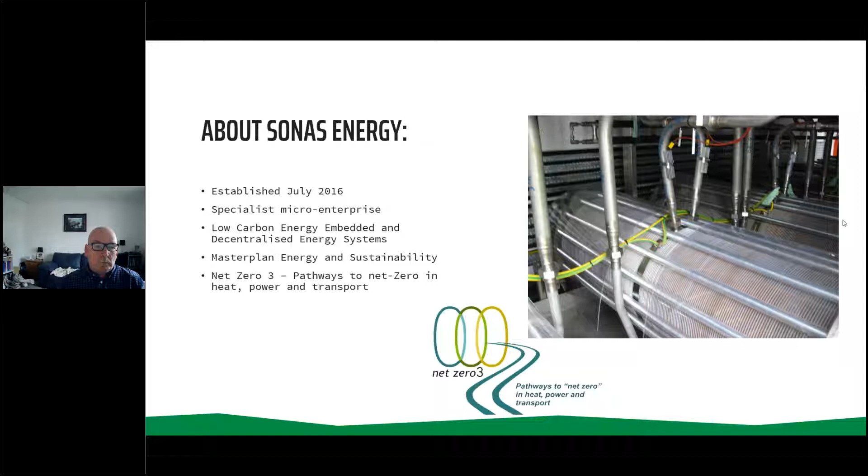Well, I started work as a physicist in the nuclear industry, working at Dounreay on the fast breeder reactor, but I'm now an energy and sustainability specialist. In the late 80s, I started a specialist sustainability consultancy called Factor 10. Sustainability at that time was a niche market and we called it industrial environmental management. I then took Factor 10 into the multidiscipline consultancy Hurley Palmer Flatt to become their energy and sustainability division based in Scotland. And I worked with Henry Boot Developments through the initial concept stages for TECA and were then novated to Robertson's to design and build the energy centre, 5 years from initial concept to commissioning. Recent roles are a smart microgrid with net zero trajectory for Westlakes Science Park near Whitehaven and work on hydrogen biofuel supply systems for decarbonising HGVs. And I'm currently working with SEC with Suzanne on the net zero trajectory for the Scottish Event Campus.

Okay, Suzanne. Okay, thanks David. So the agenda, a rough format for our presentation today. It's obviously quite difficult to condense 5 years project experience into 1 hour or 45 minutes, but we'll try and keep it concise and cover the following items. So I'm sure some of you on the call will be familiar with the project. However, I'll begin with a quick project overview covering the main features of the venue before David takes you through the energy strategy, the good stuff, in a bit more detail.

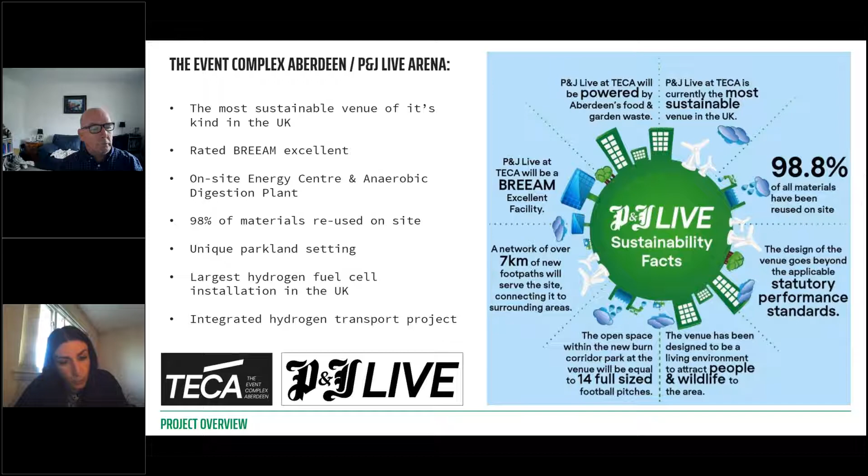So 98% of all materials have been reused on site, and the creation of a very unique parkland setting for the venue has resulted in an enhanced living environment, which is designed to attract both people and wildlife to the area. We have the largest hydrogen fuel cell installation in the UK, and also TECA is part of an ambitious hydrogen transport project that will fuel public transport buses to and from the venue.

So a bit of background on Aberdeen's vision for the facility. TECA is truly a transformational development for the city of Aberdeen. This unique facility provides highly flexible state-of-the-art accommodation, creating a contemporary world-class facility that will attract major national and international artists and events to Aberdeen.

And at the old AACC venue, a sea of temporary structures and tents had to be erected to facilitate the exhibition. So a new, larger venue was required to ensure that Aberdeen not only retained the Offshore Europe exhibition, but also maintained its status as the energy capital of Europe.

This also gave Aberdeen an opportunity to showcase renewable technologies and reflect that ambition to create the most sustainable venue of its type in the UK. So over the next 10 years, it's estimated that an additional 4.5 million visitors, 113 million visitor spend and 63 million net GVA to the Scottish economy as a result of this new facility.

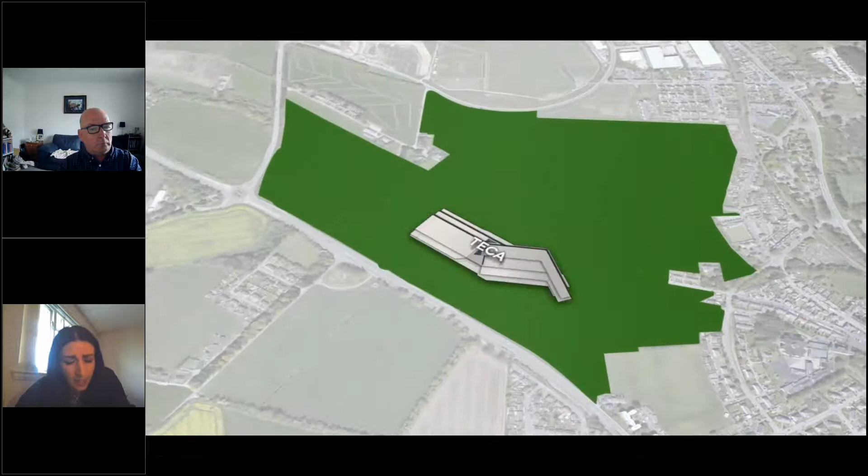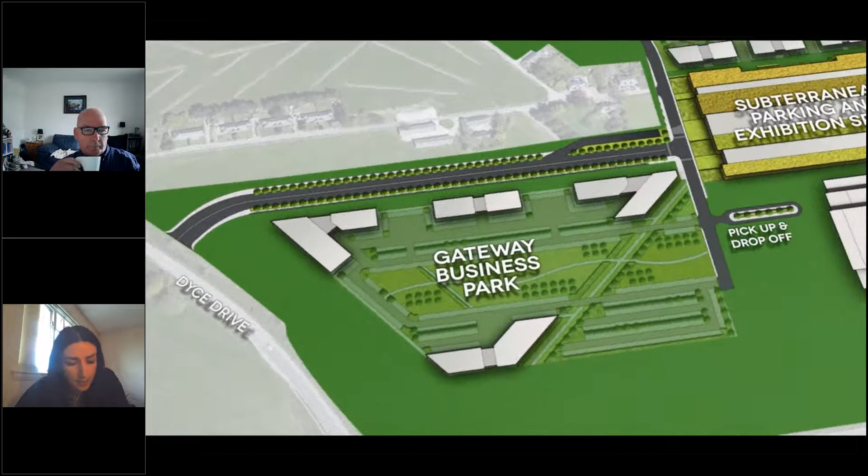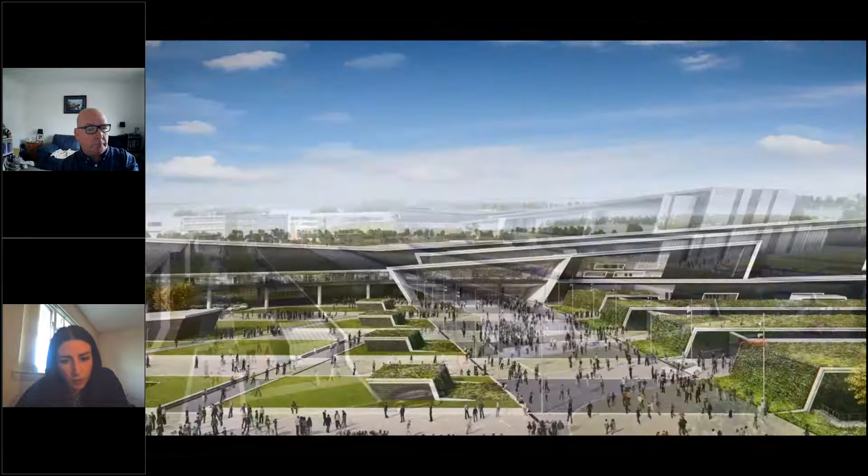So the location of the site is situated just south of Aberdeen International Airport. The Masterplan context with the TECA venue sitting within a parkland setting as part of a mixed-use wider Masterplan development. Central to this is the creation of a green-roofed subterranean car park, which doubles up as additional exhibition space, and a central landscaped plaza, which the main entrance of the building faces onto.

So if we go inside the building, on ground floor, we have a central concourse which ties together the three main exhibition halls and the adjoining 4-star Hilton Hotel.

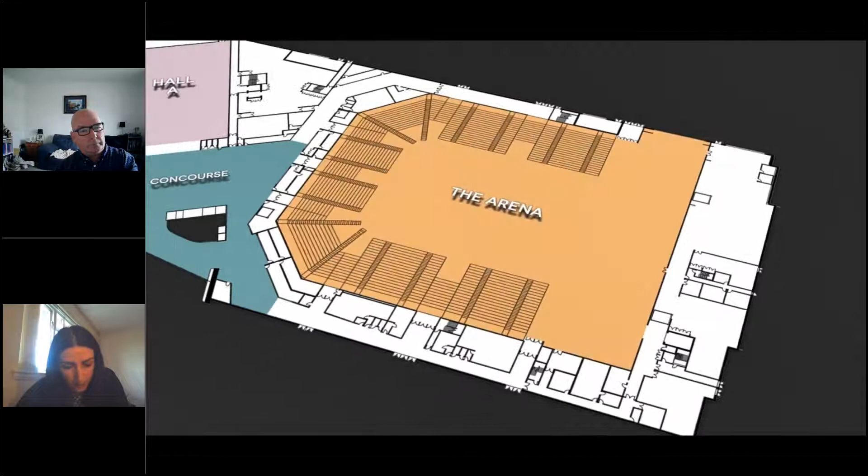At the other side of the building, we have the P&J Live Arena with VIP boxes wrapping around at first floor level, a central restaurant along with various conference suites and meeting facilities which also tie into the 200-bed Hilton Hotel at the end there.

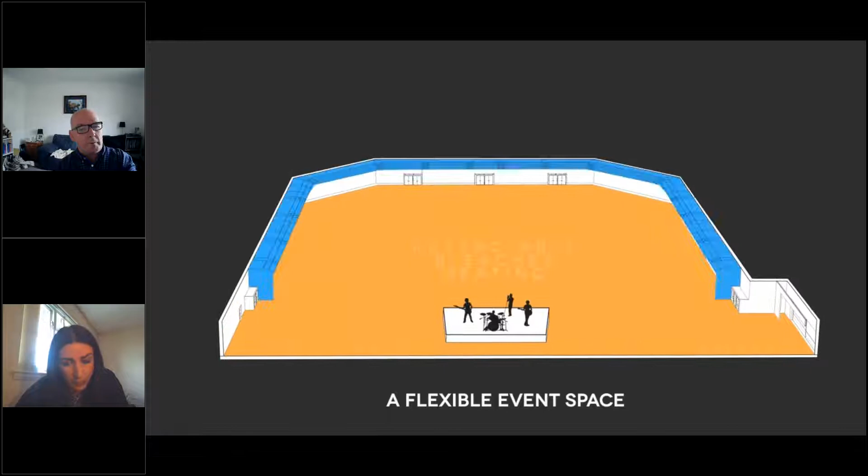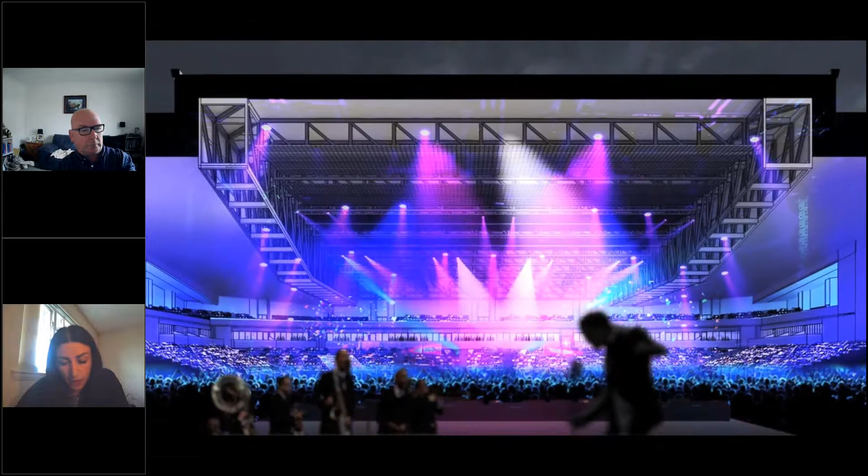Above the arena, we have an additional level of fixed seating at the second floor, and then the arena itself has retractable seating at ground floor, offering a flexible event space that holds up to 15,000 people for a live event. And this makes it the largest indoor arena in Scotland, just pipping the SSE Hydro in Glasgow to the post there.

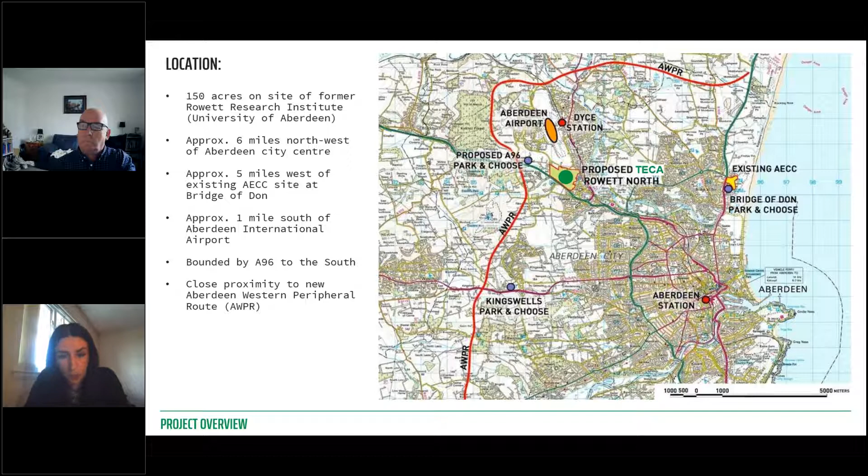In terms of site location, the site is approximately 150 acres. It was home to the former Rowett Research Institute at University of Aberdeen, and under contract to the developer Henry Boot Developments. The Rowett were relocating to a brand new campus, thus creating an opportunity for significant redevelopment and regeneration of the Masterplan area. It's approximately 6 miles northwest of Aberdeen city centre, just south of the airport, bounded by the A96 to the south and in close proximity to the new AWPR route.

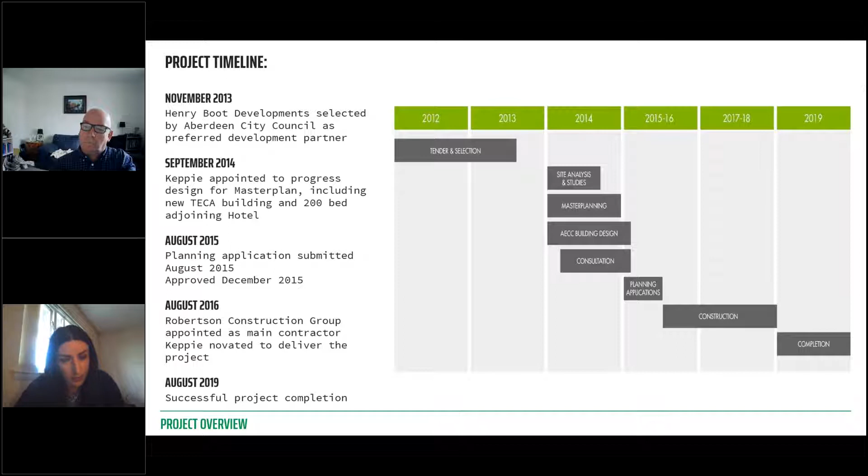Project timeline: in November 2013, Henry Boot Developments were selected by Aberdeen City Council as their preferred development partner. I came on board when KEPPIE were appointed around September 2014 to progress a PPIP master plan, as well as a detailed application for the new TECA building and the adjoining 200-bed hotel. We submitted the planning application in August 2015, and it was approved in December of the same year - a really smooth process. Just a year later, Robertson Construction Group were appointed as main contractor to deliver the project, and after a 3-year construction period, the project was successfully completed in August 2019.

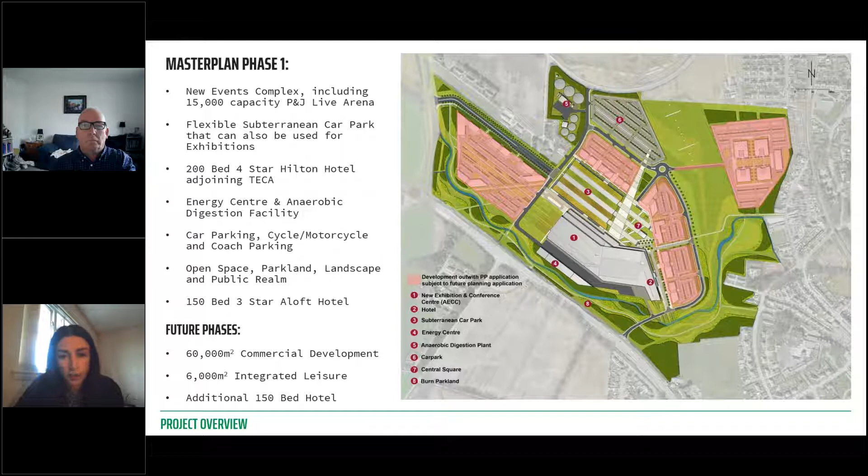The new facility represents phase 1 of the wider TECA master plan, acting as a catalyst for the regeneration of the Rowett site and surrounding areas. Phase 1 includes the TECA building itself, a flexible subterranean car park that can also be used for exhibitions, a 200-bed 4-star Hilton hotel physically joined to TECA, an energy centre and anaerobic digestion facility, car parking, open space, parkland, landscape and public realm areas, as well as an additional 150-bed 3-star hotel. Future phases as part of the PPIP include potential for around 60,000 square metres of additional commercial development with integrated leisure use, and hopefully another 150-bed hotel in the pipeline too.

In terms of the interior of the TECA building, there's a variety of highly flexible state-of-the-art accommodation offered, the main space being that arena - a 9,000 square metre arena providing 15,000 maximum capacity for live events. We've also got a variety of exhibition halls, 6,000 square metres of main halls subdivisible into 3, and this mammoth subterranean space, which provides an additional 33,500 square metres of exhibition space and can be used for large events such as Offshore Europe.

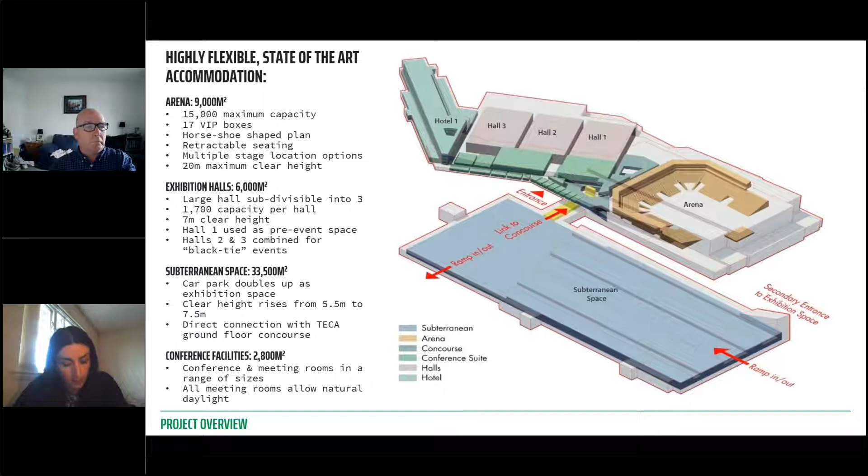The subterranean space has a green roof and living walls, which tie it nicely into the landscape design and into that public plaza in front of the main entrance. On the upper levels, we have a variety of conference facilities, all offering state-of-the-art AV conference technology.

The project was delivered using BIM 3D modelling. BIM stands for Building Information Modelling, and it's essentially a method of coordinating project information using a common data environment - bringing together all information from different project disciplines into one single point of reference, with models from different disciplines that we then collate and collaborate together.

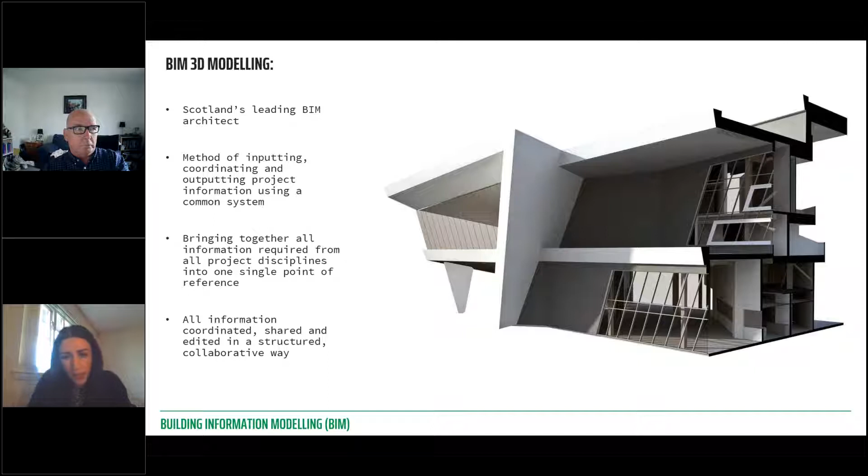For example, we've got the structural engineers' model, which has all the different steel and concrete elements modelled. Layer on top of that, the mechanical engineers' components, so the building services model. And then on top of that, we layer on the building envelope. This results in a fully coordinated architectural 3D model.

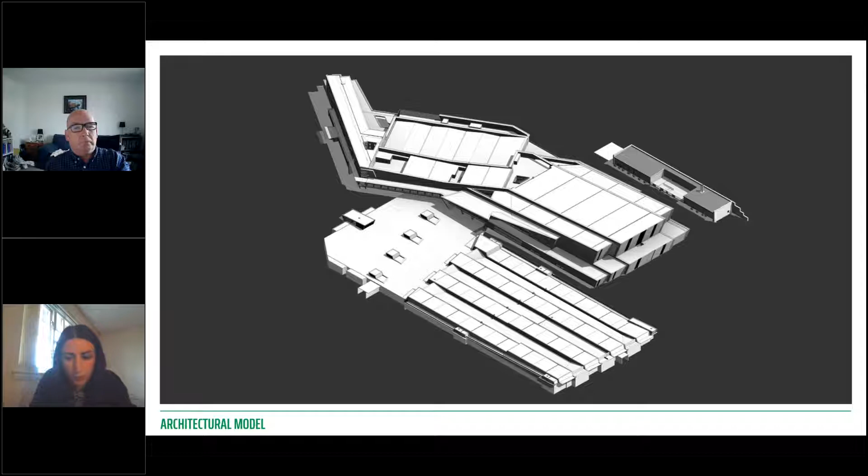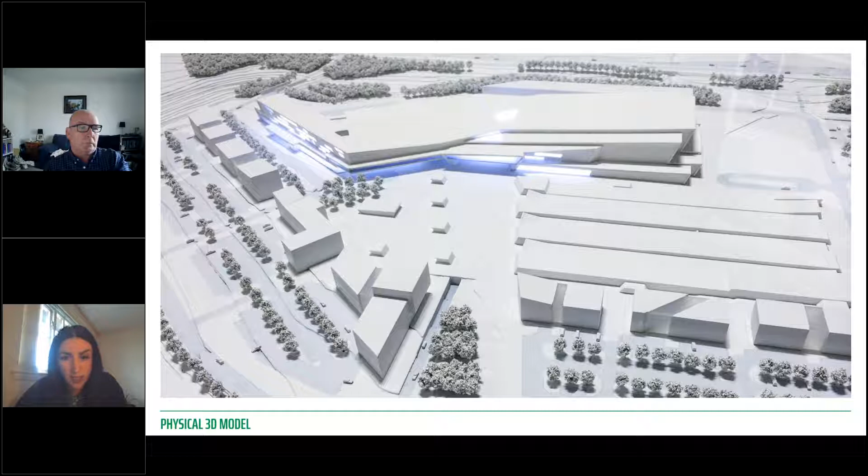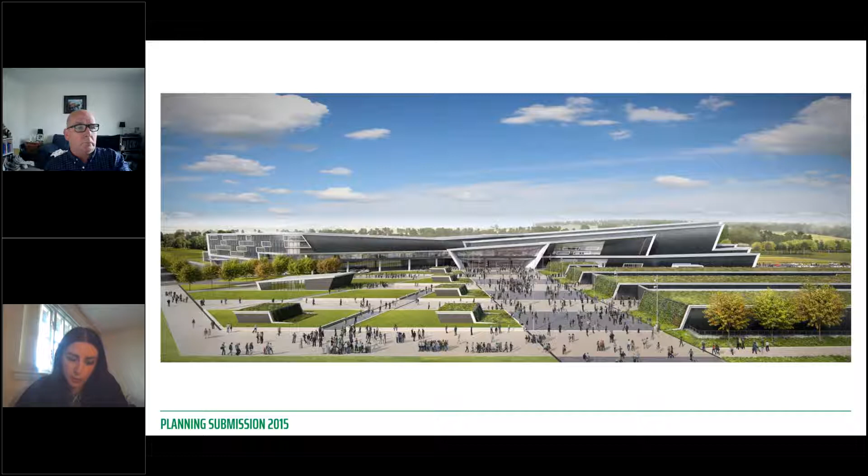The 3D model information also allowed us to develop a series of key views as agreed with Aberdeen City Council Planning Department as part of the planning submission. The images produced for planning were also used for marketing purposes and featured quite heavily in the local press.

From an architectural point of view, this was very advantageous to us, as when the contractor came on board and inevitably we entered into some value engineering discussions, we always had this solid set of photorealistic baseline images that we could refer back to, and this ensured the original design intent was not compromised.

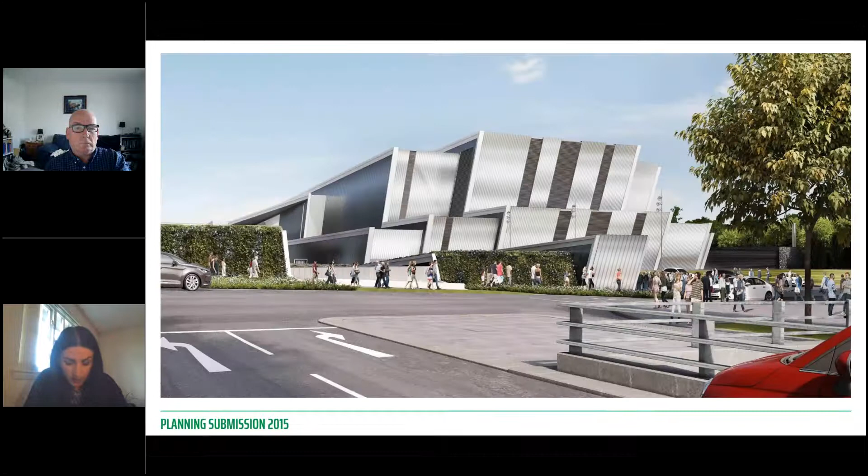From a personal point of view, I must say this project is one I'm most proud of when I look back at comparing the initial CGI imagery with the end result. I've got a series of quick images here - 2015 planning images versus 2019 as-built photographs - just to show you the difference. We've got the main arena angled facade from the west, the main entrance portico and the public plaza, and then a view of the Hilton Hotel gable from the south.

With a project of this size and scale, it's sometimes quite difficult to get your head around the sheer magnitude of the spaces you're dealing with. So just for a bit of fun, we've pulled together a few random facts to hopefully give you some idea of the sheer scale of the development. I'll rattle through these.

The TECA building is 30.5 metres high and just over 418 metres long. If you placed the seats in the arena end to end, it would stretch for over 6,000 metres. It would take 89 Olympic-sized swimming pools to fill that subterranean space. The arena alone could hold up to 718 billion Smarties - I'm not sure who worked that out. A network of over 7 kilometres of new footpaths serve the site, connecting to the surrounding areas, and importantly, the new parkland setting equals the size of 14 football pitches.

TECA opened its doors in August 2019 and had a very successful first few months before COVID inevitably put on the brakes. Offshore Europe took place there in September 2019. There was then a series of really successful live events, including Liam Gallagher in November. BBC Sports Personality of the Year was hosted there in December, and Lewis Capaldi's sold out gig went ahead just a couple of days before lockdown in March 2020.

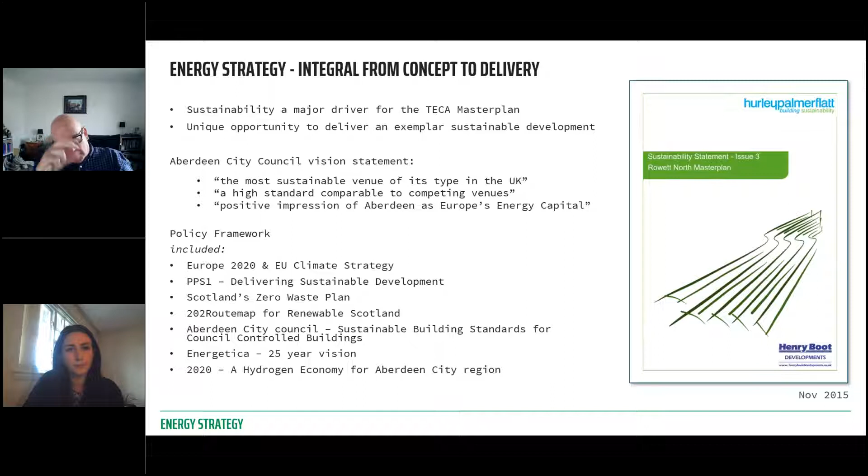For the energy strategy, our key was Energetica. The site sits at the bottom of the Energetica corridor, and that's the strategy for that area of Aberdeen, going right up towards Peterhead. At that time, Aberdeen City had also launched its first hydrogen strategy, but a key local element was Aberdeen City Council's Sustainable Building Standards for council controlled buildings.

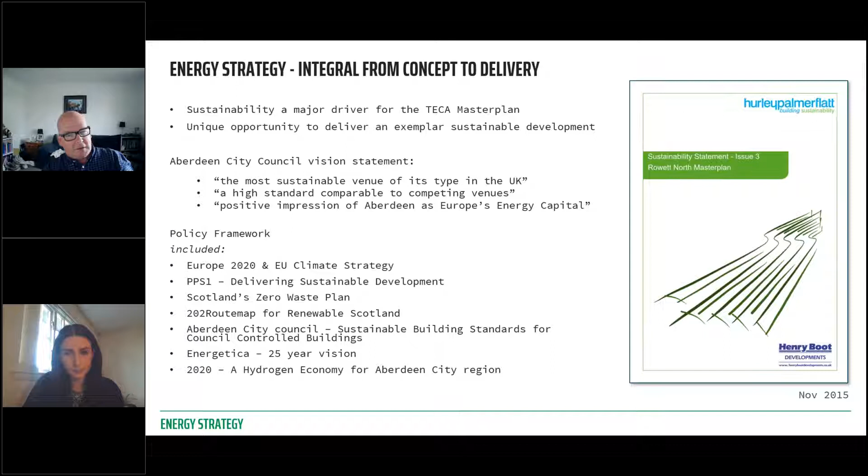Taken together, all of this meant that we were going beyond compliance. The client had specified BREEAM Excellent, and the aspiration for a low carbon solution was there from the start. Our sustainability statement included elements of BREEAM, some of the planning conditions around sustainability, and the energy strategy, but it also had economic and social sustainability targets and goals. That sustainability statement then became a contract document for Robertson's to help deliver and maintain the vision for sustainability right through the whole process.

Okay, next slide. Right, turning now to the energy strategy itself. It's quite a busy slide, but it shows the energy centre in the centre feeding the 3 buildings of TECA and the 2 hotels.

When we started looking at the energy centre for TECA, it's quite a difficult building to provide renewables for - it's got a very peaky demand. In addition to that, the location, although great, is actually not very good for renewables because of the proximity to the airport. So solar and wind were very restricted.

The obvious solution was a gas-fired CHP, but Aberdeen City wanted to push further and go beyond a fossil fuel solution. So we took this whole system approach with the Trigen Energy Centre in the centre, which delivers heat, power and cooling to the building.

The AD plant itself was sized to be larger. It was going to take Aberdeen City food waste, but it was larger than that. It's a co-fuel plant, and it provides sufficient gas for the energy centre through both those routes, from the gas through the grid and directly. So it takes Aberdeen City's food waste along with purpose-grown crops, and provides the fundamental energy for the setup.

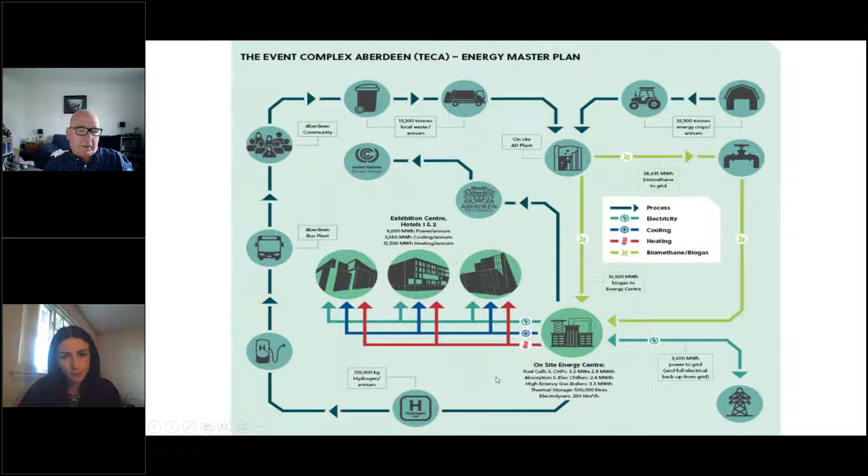These are charged from the hydrogen fuel cells, either directly or running through an absorption chiller, and then the peak demand is met from the spark ignition CHP units that are within the energy centre. Any supplementary power can be exported back into the grid, but we also utilise some of the surplus power to produce hydrogen for the buses in Aberdeen through the on-site electrolyser.

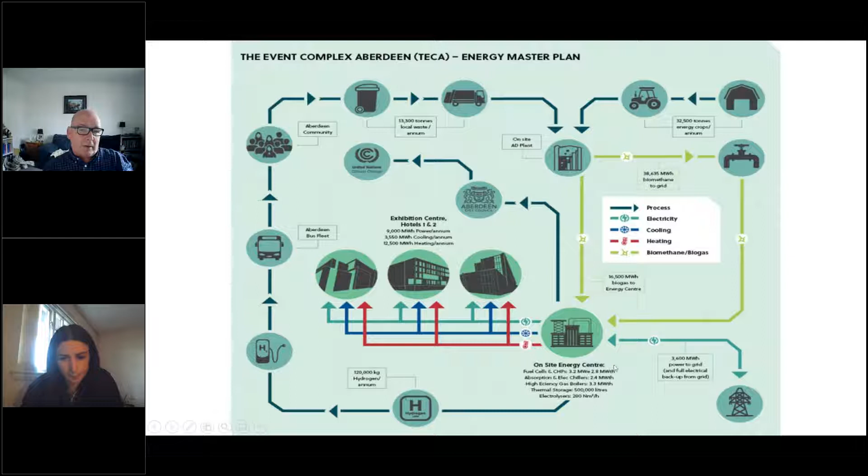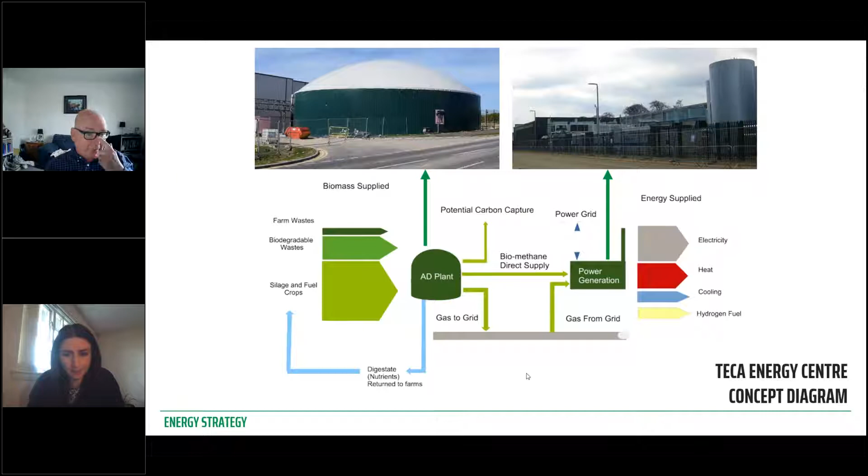We now look at how it's realised in practice. It's very difficult to get a good picture of it because it's a long building and it's very well blended into its environment. But the design of it is the result of trying to meet a number of design requirements.

First of all, from an engineering point of view, it needs to be near the arena to minimise the pipe runs for the large capacity heat and cooling pipes. And energy centres are usually square blocks, but this one is long and accommodates 3 separate areas. It's quite a complex energy centre.

But from an M&E perspective, this long layout actually worked beautifully, allowed us to have a service bus running right along the back elevation of the buildings and all the plant hanging off this.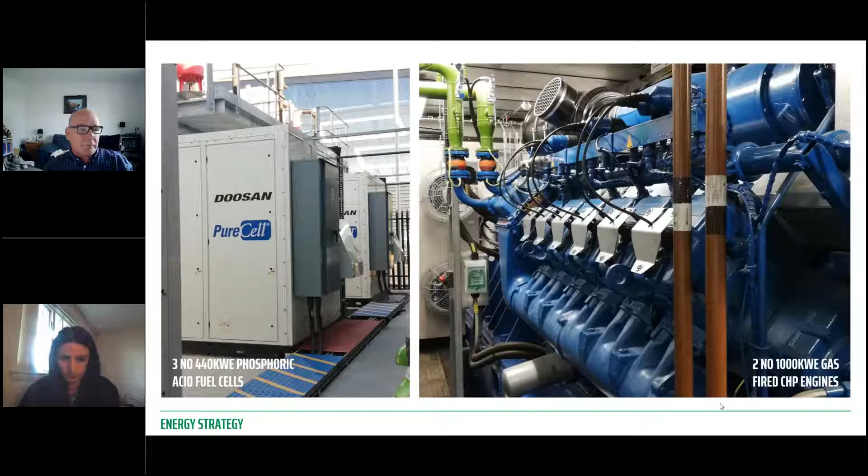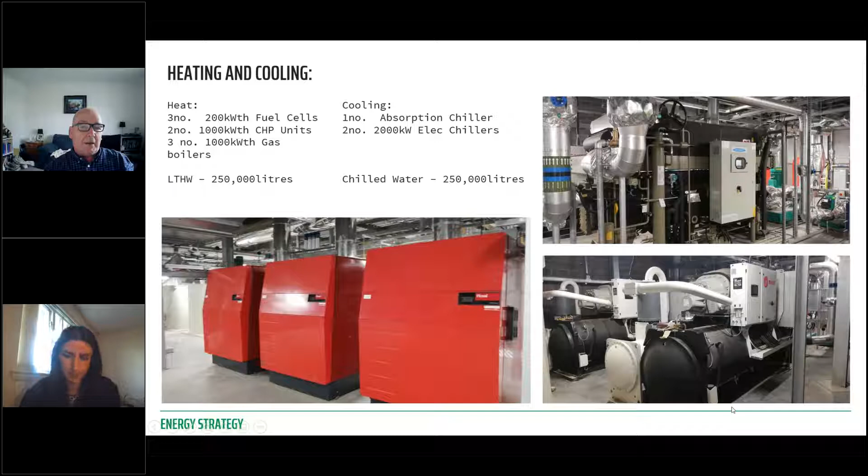This is an internal shot of the heating and cooling plant. So the three large gas boilers, the three 1 megawatt gas boilers, supplement the heating from the fuel cells and CHP units. And on the right-hand side, the top right is the absorption chiller, and the bottom right are the electric chillers.

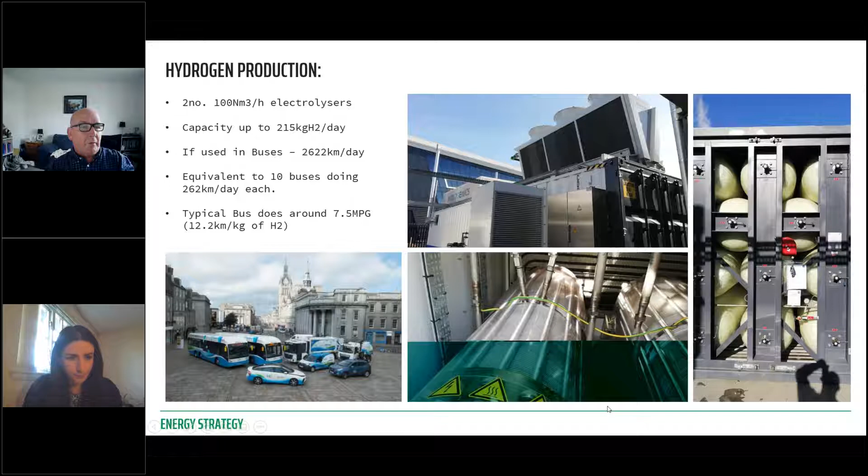And what does 200 kilograms of hydrogen equate to? Well, if you're using buses, it's about 2,600 bus kilometres per day. So that's roughly equivalent to 10 buses doing about 250 kilometres each. A typical bus does around 7.5 miles per gallon, and in hydrogen terms, that's about 12 kilometres per kilogram of hydrogen.

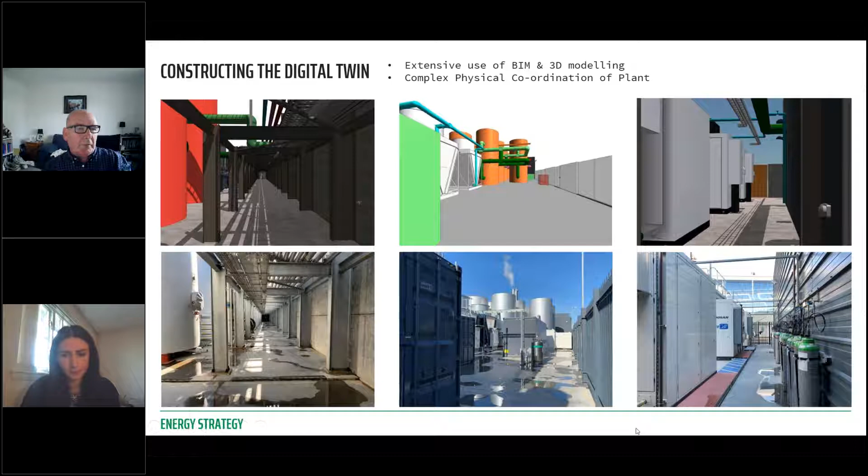Within the modelling, from the early stages right through the design stages, we did extensive modelling of the technical and financial operation of the energy centre. It's a fairly complex set of equipment, and the key challenge is to model a full year, taking into account how the arena, auxiliary halls and hotels would be operated with exhibitions and other events, and how heat, power and cooling demands would be affected by seasonal and daily demand profiles. This allowed us to do the initial plant sizing and check how the various components of the energy centre would interact with each other and optimise the design.

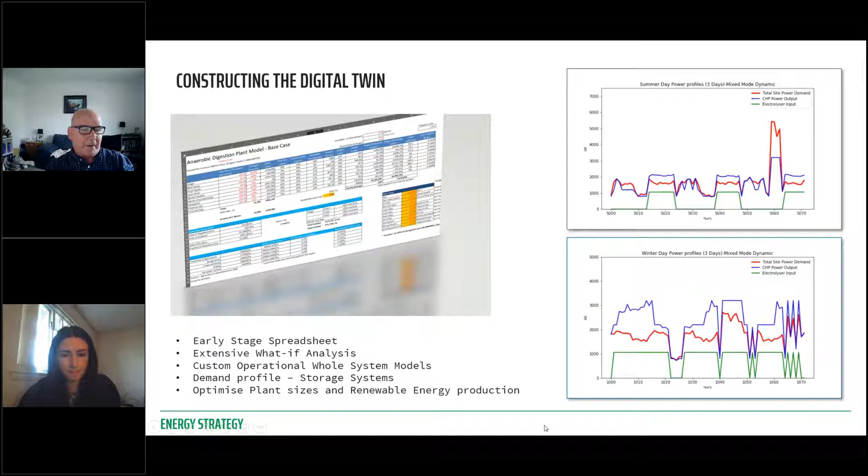At the concept stage, we modelled a lot of different sizing options for the AD plant, the static hydrogen fuel cells and CHP, and conducted life cycle costings to combine the operational costs with revenues from environmental support schemes like the renewable heat incentive and feed-in tariff available for different parts of the components. That was very much a moving goalpost as these changed - at that time it seemed every 6 months. But the idea was to optimise the life cycle costs.

The final pictures here are the energy centre from the outside with the CHP stacks at the left-hand side, and bottom right, the view between the energy centre and the arena through the yard where the trailers can be parked. This is getting more into Suzanne's area again, so I'll pass back to her.

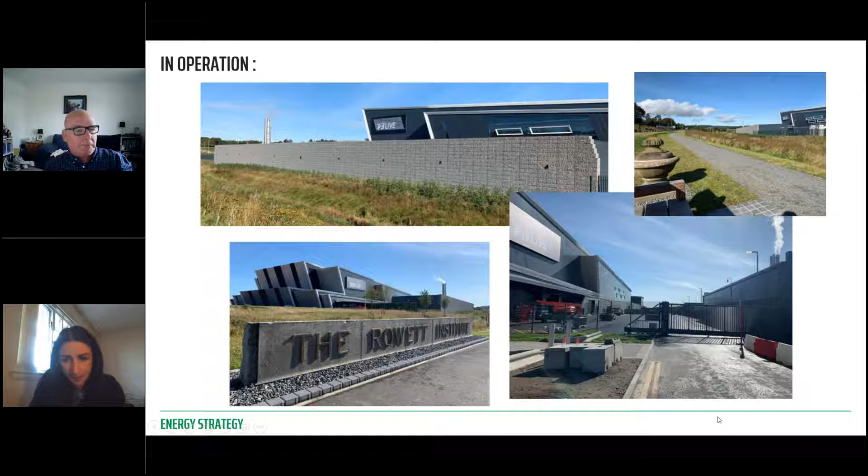Thanks for that, David. In this next section, I'm going to focus on a few key items with regards to site-specific sustainable design features and how these were integral to the planning process - mainly the reuse of materials reclaimed from demolition of existing buildings on site, and also the creation of green open space and high quality public realm areas within a parkland setting, which is actually quite unique for a development of this type.

The site was once home to the former Rowett Research Institute, University of Aberdeen. This was a mix of research, academic and agricultural buildings constructed mostly between 1920 and 1955. It was added to in a piecemeal fashion, so we had everything from chicken sheds to granite library buildings. One of the conditions of the detailed planning consent was to ensure all these buildings were recorded and photographed extensively prior to demolition to ensure a historic record of the site. However, none of the buildings were actually listed or within a conservation area.

There was a total of 55 buildings on site to be demolished, of which 6 were constructed of granite and 1 of red sandstone, which is quite unusual for Aberdeen. In line with Aberdeen City Council planning policy, retention of granite buildings is encouraged even if not listed or in a conservation area. However, where a large granite building that is not listed or in a conservation area is to be demolished, the council will expect the original granite to be used on the principal elevations of the replacement building. So the granite was taken down carefully and set aside for reuse within the new development.

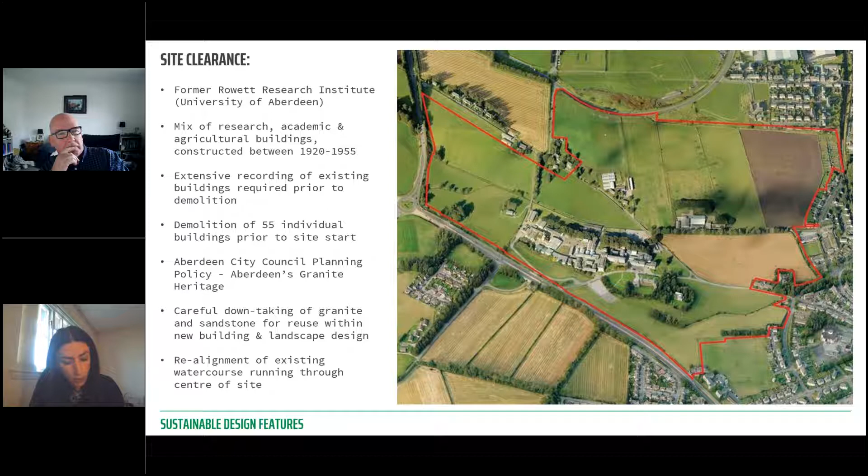Another key part of the initial site clearance works was the diversion of the existing Green Burn, the watercourse which ran through the centre of the site. Key to the development of the site was the rationalisation of that watercourse. There had been a history of flooding in the Greenburn area, and the redesign of this diverted watercourse would look to reduce the flood risk and improve the water environment moving forward.

The diversion of this watercourse created a unique opportunity for the creation of a linear park along the southern edge of the site in which the Energy Centre building sits. Structured woodland planting provides screening around the Energy Centre and on parkland, visual integration of the development from the A96, and the development of a comprehensive network of footpaths throughout the parkland enhances the green space network, providing recreational space and strong pedestrian and cycle links between the surrounding communities. By creating this mixed-use facility within a parkland setting, TECA becomes not only a valuable community asset, but also an important new public place for the City of Aberdeen.

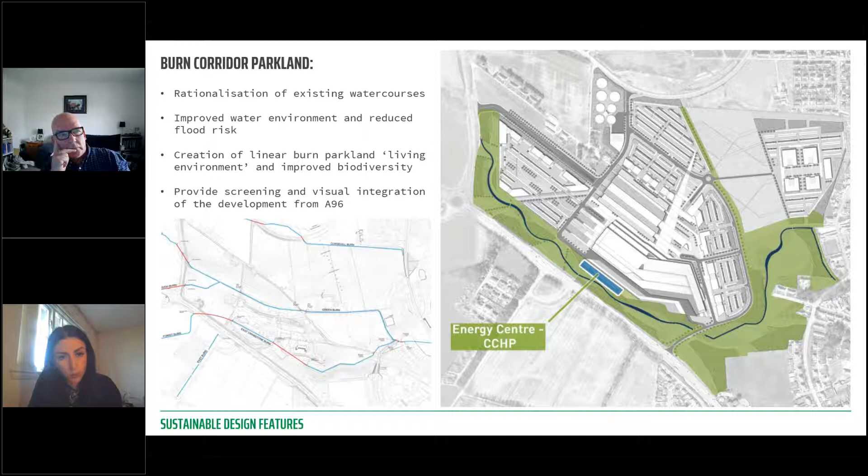In the creation of this burn corridor parkland, approximately 30,000 new trees and shrubs were planted as part of the first phase of the development. All species had to be agreed in advance with Aberdeen International Airport, using a bird strike mix as part of the bird hazard management plan for airport safety. Due to proximity to the flight path, planting must not provide nesting opportunities for birds, and anyone from Aberdeen will know, given the size of seagulls up there, why that is.

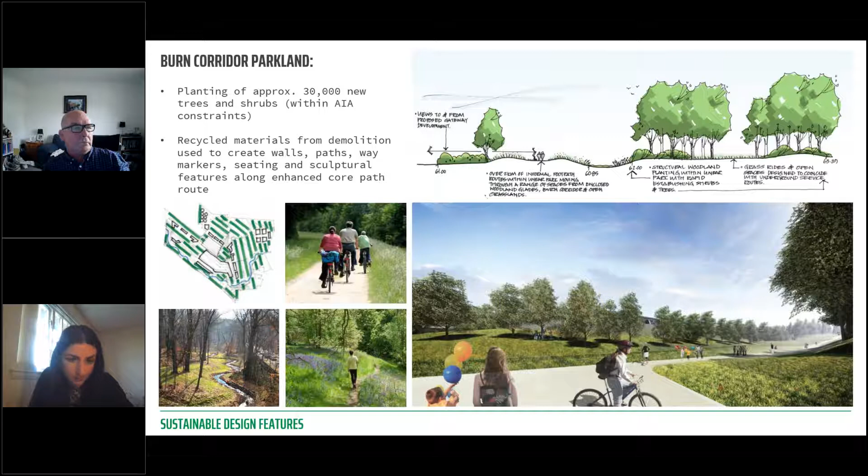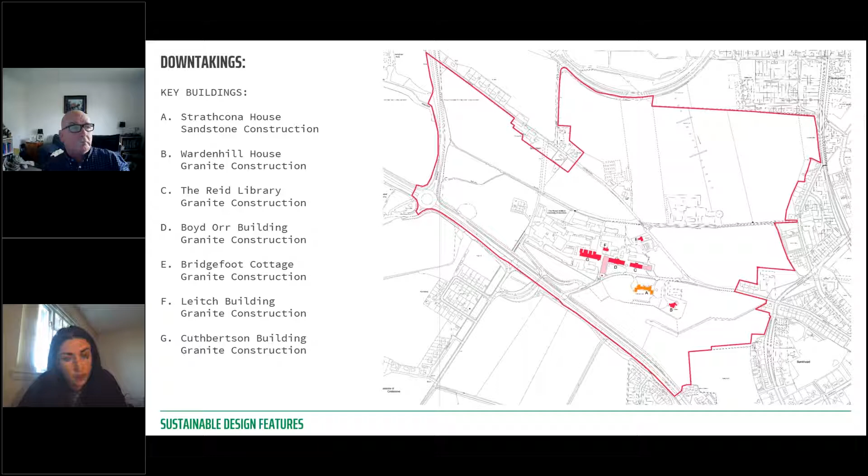Recycled materials from the demolition of key buildings on the site were used to create a series of walls, footpaths, way markers, seating and sculptural features along the core path route as part of the public art strategy. A number of existing key buildings were identified as having suitable stone or granite for reuse within the development. There was a large number of granite blocks of varying quality, shapes and sizes. Some buildings had features of particular interest, such as carved stone features or decorative elements, and these were carefully removed and set aside to be integrated into the landscape design.

A number of key locations were identified early on as being suitable for reuse of reclaimed materials within the development. The first was the Energy Centre building, as David described, which sits in the Burn Parkland to the south of the main TECA building, just in the centre of the diagram. This was seen as an ideal location for the reuse of the reclaimed granite, as its prominent location and visibility from the A96 could be justified as a principal building elevation in line with local planning policy.

From an architectural point of view, this gave us an opportunity to create something much more than just your usual bog standard typical energy centre building, which, no offence to David, they aren't generally known as being things of architectural beauty. It also meant, selfishly, that we didn't have to find a home for all this reclaimed granite on the main walls of the arena building. Given its futuristic angular nature, I don't think that would have been too successful.

The second key area identified was a zone just south of the hotel, where the main access to the site bridges over the diverted burn. This is in close proximity to where Strathcona House, the red sandstone building, once stood, so that was identified as an ideal location for use of the reclaimed sandstone elements. Lastly, a number of stone features were identified to be distributed along the network of footpaths at key junctions, designed as part of the public art strategy.

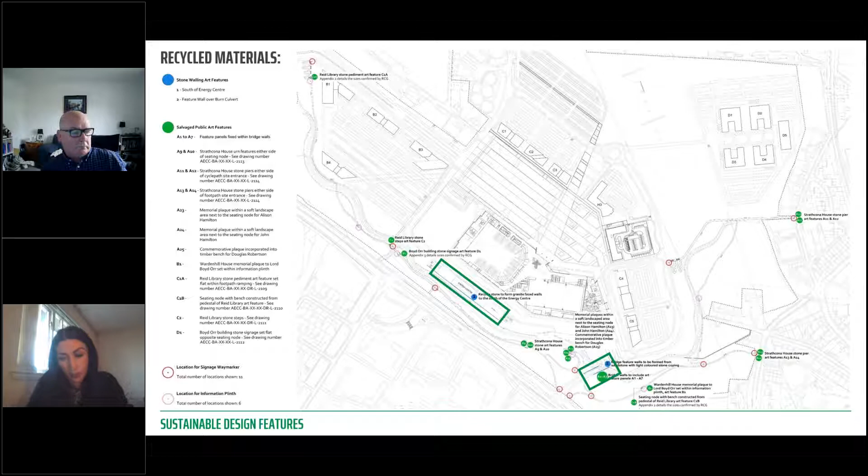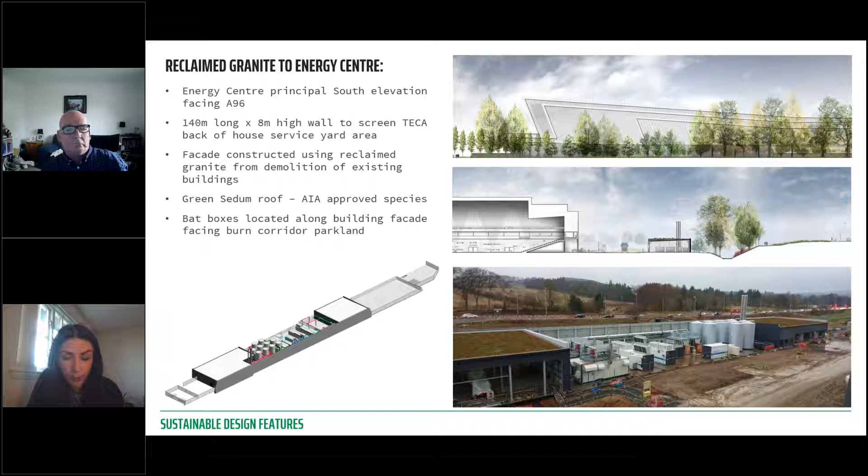The energy centre's south elevation, facing onto the Burn Parkland, screens the TECA service yard and back of house areas, as David says. The granite wall itself is approximately 140 metres long by 8 metres high, constructed using a series of gabion baskets filled with crushed reclaimed granite blocks. The energy centre also has a green roof system similar to the subterranean space, a sedum blanket with Aberdeen airport approved species as part of the bird hazard management plan.

As during demolition some bat roosts were found within the existing buildings, a series of bat boxes were integrated into the granite wall facing along that burn corridor.

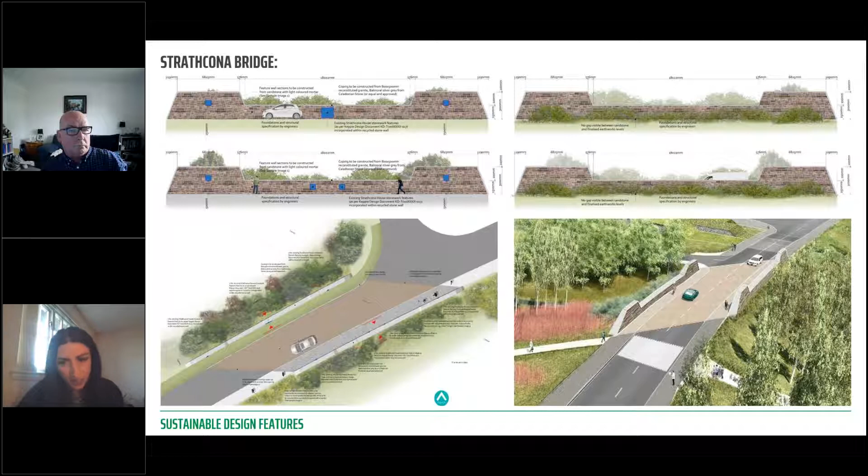The red sandstone from the demolition of Strathcona House was used to create a feature wall bridging over the diverted burn at the south entrance of the site, enhancing the sense of arrival and creating a gateway into the development from the south. These walls were designed with a nod to the angular geometry of the new TECA building, while also reflecting on the history and heritage of what stood there before. Carved stone features from Strathcona House that had been reclaimed and salvaged were inserted along the length of that wall to add points of visual interest along the pedestrian journey.

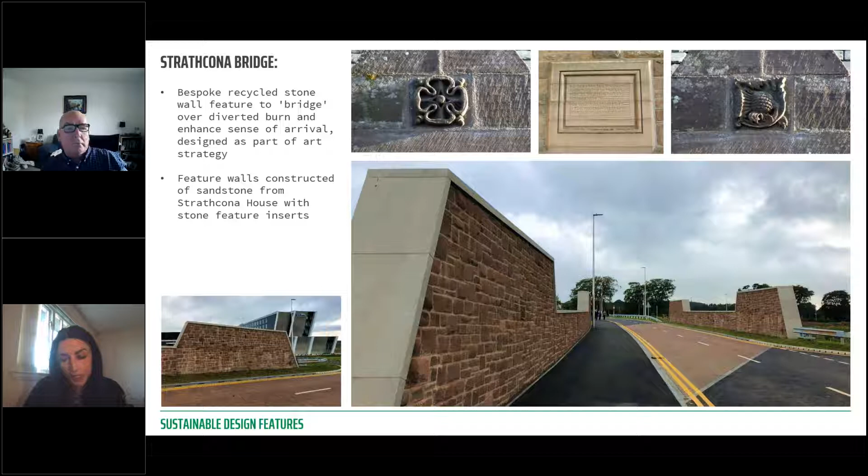And lastly, a number of other salvaged stone features were set aside for reuse within the landscape design, from the feature pediment above the entrance to the Reid Library, to the commemorative plaque to Lord Boyd Orr, who was indeed the first director of the Rowett Research Institute.

These features were incorporated into the landscape areas along the footpath of the Burn Parkland, designed as part of the art strategy. Key features were used at nodal footpath junctions with granite way markers, giving a nod to the history and heritage of the site.

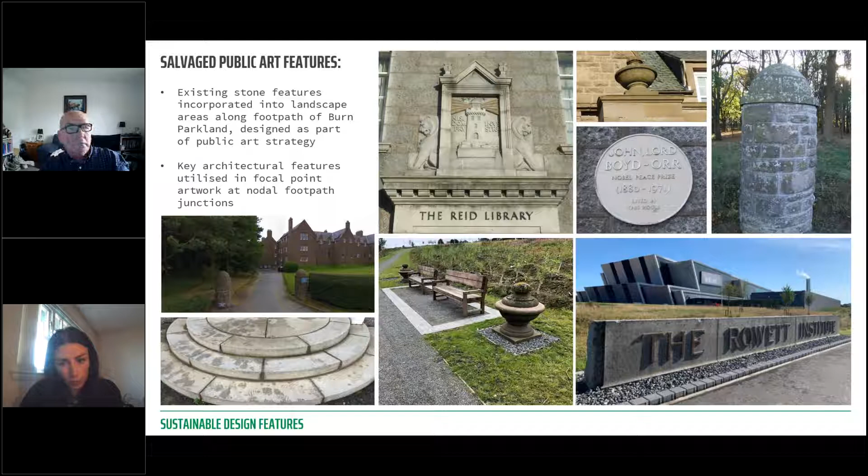I think the final image at the bottom right of the screen shows, in my opinion, the successful integration of the old with the new, with the energy centre central to that in the middle. I think that's quite an apt image to end on. So for me, forward-thinking, sustainable design solutions with a nod to heritage and the sympathetic reuse of those reclaimed materials are really what made this project a success.

So I'll now hand you back over to David, who's going to give hopefully some valuable insights into lessons learned on the project from a net zero perspective. Thanks, Suzanne.

Well, 5 years in construction, it's difficult to cover a lot of the aspects of it, but looking back to think about the lessons learned, would we do it the same again, or what have we learned from the process? I think the first thing to say is that we started this more than 5 years ago, and at that point net zero was not an aspiration, but achieving the lowest carbon intensity possible was.

As it turned out, we did achieve net zero because of the way in which we had to deal with the energy resilience and effectively use the grid for storage. So we export more renewable energy to the grid than we actually use.

But the process, what we learned about the actual process - well, first of all, it is very much a whole systems approach. The energy strategy is integrated with the sustainability strategy, as I hope we've illustrated. But the energy strategy itself is a whole systems approach, looking at the demand side, so working with the M&E designers of the hotels and the arena to minimise demand, and in particular to minimise the peak demands and match them to the available energy that we have on site.

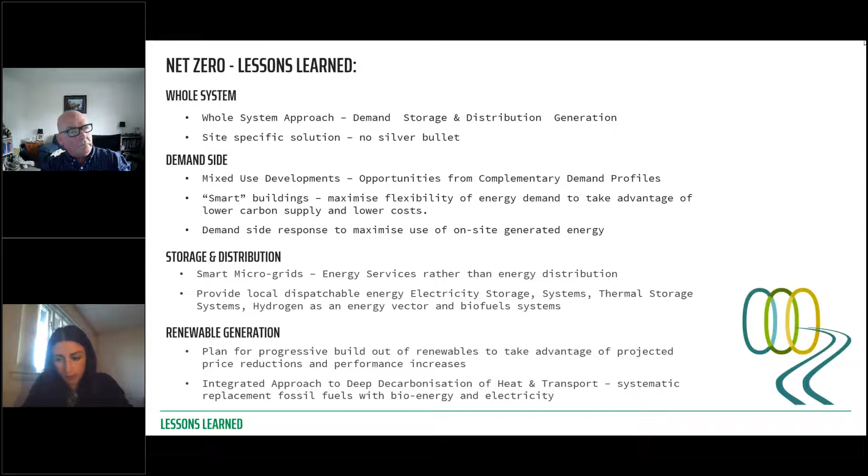Hi there, it's Donna again. Thank you so much for that, and thank you for dropping in about the seagulls there, Suzanne. Aberdeen, the Silver City by the Golden Sands, with the seagulls that could be pterodactyls. There's a couple of questions coming in already, so we can maybe start with those, and while we're answering those, if folk want to think about what they want to ask, we can pick those up.

A question came in about how you evolved the development of the site, and how it ended up being as it's shown today—was there anything that changed or moved to accommodate it? There were a number of site constraints which, for a building of TECA's mass—the site was 150 acres—meant things like the diversion of the watercourse and proximity to the flight path limited where the real mass of the arena could sit. We couldn't move it closer to the flight path, and it's bounded by the A96. So certain site constraints unique to that site are how we ended up with the master plan as it currently stands, though we tried and tested a number of routes to get there, ultimately landing on that one mass due to height restrictions from the flight path.